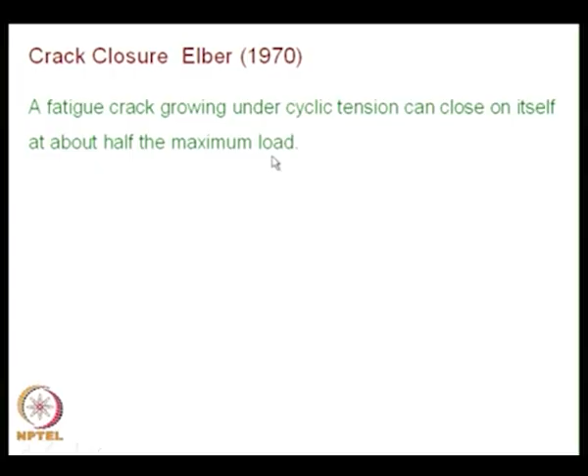So that is the reason why that chapter was covered earlier, and now we will take up a very important contribution by Elber. This was done in 1970. He brought out a concept called crack closure, and what he observed was a fatigue crack growing under cyclic tension can close on itself at about half the maximum load, and this was purely an experimental observation. Based on the experimental observation, he arrived at this kind of a very interesting result. This effect becomes significant for crack growth calculations under random loading.

So you will have to keep in mind, fatigue is one of the most difficult types of loading that acts on the structure. You will invariably have variable amplitude loading, and one of the difficulties is finding out the actual load spectrum. It is not simple. There are methodologies available, and you have to study the literature and then only calculate the actual load spectrum. So invariably you will have variable amplitude loading. From the modeling point of view, we may study under constant amplitude loading how the crack grows, but if you want to take the knowledge to the field, you will have to account for random loading, and if you go for random loading, you will have to bring in the observations of crack closure into your life estimation calculation.

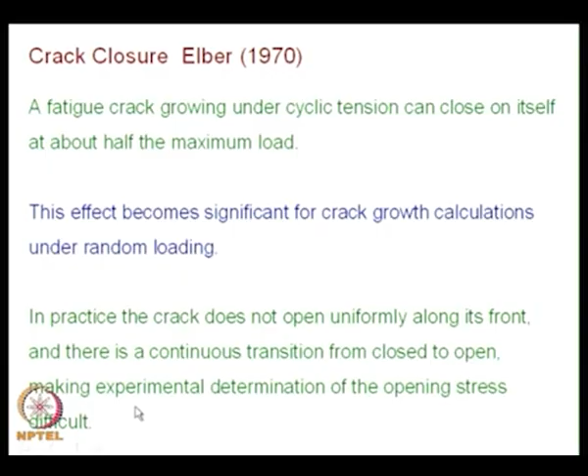And what we find is the crack closes at about half the maximum load. And how does the crack open? What is the difficulty in the experimentation? In practice, the crack does not open uniformly along its front, and there is a continuous transition from closed to open, making experimental determination of the opening stress difficult. See, unless you make certain observations by experiment and then identify these aspects to be modeled by a numerical model, you cannot develop a numerical model. So, initially you need to have experimental observation for such complex phenomena.

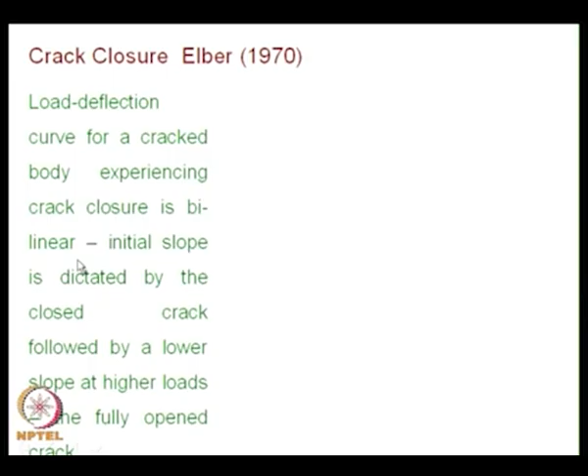So, one of the difficulties is how to see whether the crack is fully opened or not, and how do you judge whether a specimen displays crack closure phenomena. People also have methodologies to look at that, and one of the simplest ways is to get the load deflection curve. So, if you get the load deflection curve for a cracked body experiencing crack closure, it is bilinear. This is the observation, and you have the displacement versus applied stress, and the stress displacement relationship is bilinear. So, you have slope changes from the initial to later part.

Initially it is more stiff, the initial slope is dictated by the closed crack. So, that means the crack behaves as if it is smaller in length. Then you have a slope which is different. At higher loads, because the crack is fully opened, the slope is also different. So, if a fatigue cracked specimen experiences a stress displacement behavior as bilinear, which is a model again, in practice you will have a smooth transition from this to this, and that is also depicted here.

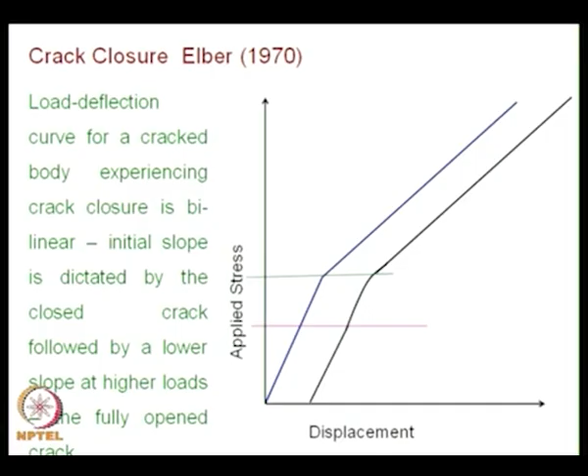And the question here is, how will you identify when the crack closes and when the crack opens? This is a very difficult measure experimentally, and people have found various ways to do that. One way of describing this is, you say at this stress, when there is a transition of the slope, the crack is fully opened, and when the curved portion becomes straight here, you say that part of the crack is closed. So, this is one way of estimation. At this stage it is also wise to look at what was the history in the case of crack closure.

Initially people did not believe that crack closure could happen. This was done by Elber. There was an article written by him in Current Contents in 1983, and in that he says, the original discovery of the crack closure phenomenon was made when I was a graduate student at the University of New South Wales in Sydney, Australia. Rather than being the result of years of directed effort, it was a split second observation made while cutting up a fatigue cracked plate. See, this is very important.

Sometimes you do a very systematic study, yet you do not get a result. Here he admits it was not a systematic study, he chanced upon an interesting observation, he was a good experimentalist, he did not miss out the details. See, this is very important. Experimentalists have to be alert, look at anything deviating from your basic understanding, record it, and be scrupulously honest, because if you report what you observe in all its totality, new theories can develop. That is what happened in crack closure concept.

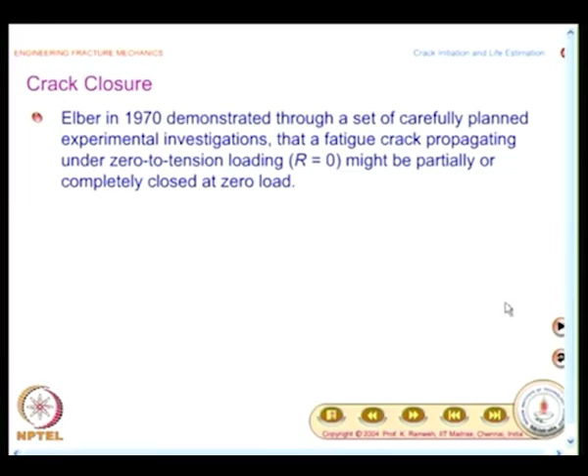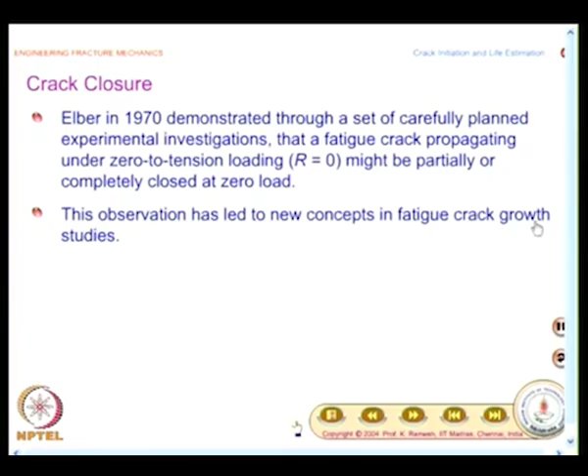So, this is what I had mentioned, which is summarized again. Elber in 1970 demonstrated through a set of carefully planned experimental investigations that a fatigue crack propagating under 0 to tension loading, that is R equal to 0, might be partially or completely closed at 0 load. And this observation has led to new concepts in fatigue crack growth studies, obviously after initial hesitation. People were not accepting his theory initially. Once it was convinced, people said how it could be modeled. The ultimate usage of this observation is how do you modify your crack growth calculation. There is a designer's approach. We will see that designer's approach first.

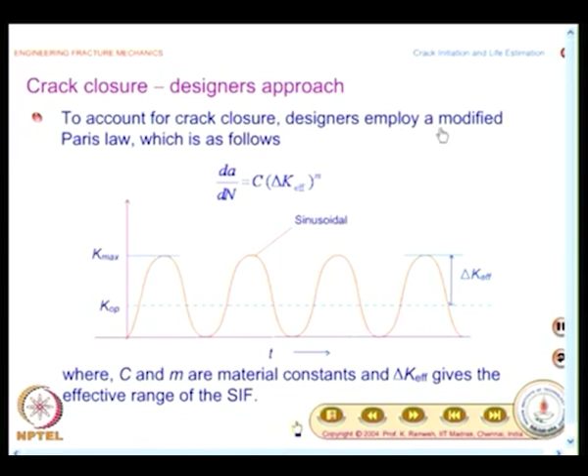So, to account for crack closure, designers employ a modified Paris law, which is as follows. Normal Paris law will have da/dN equal to C delta K power m. Here the delta K term is put as delta K effective. And how do you define what is delta K effective? Suppose I have a sinusoidal variation, and I have K max and K minimum is 0, but at a particular stress only the crack starts opening. Afterwards, only the crack becomes effective. The crack closes by this value of K op. So, the effective delta K is between K max and K op.

So, people could embed the phenomena of crack closure by taking delta K effective. Now, the question is how to find delta K effective. That is where the challenge lies. It is not a simple task. Conceptually, the crack is effective only part of the cycle. So, you look at what is the effective delta K rather than the actual delta K. So, you have to find out how to get delta K effective.

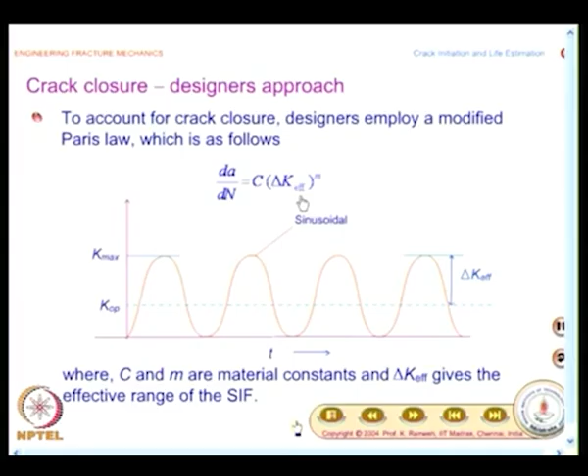Several models have been proposed. People have done experimentation and calculated it, and you will also have to bring in the effect of stress ratio R. As a function of R, how does delta K effective change? So, this is how research proceeded, and we will see how they develop delta K effective. So, delta K effective is K max minus K op, where K op is the value of K1 when the crack opens completely during the cycle, and this is difficult to evaluate, but we have to do that if I have to embed crack closure in our crack growth calculation.

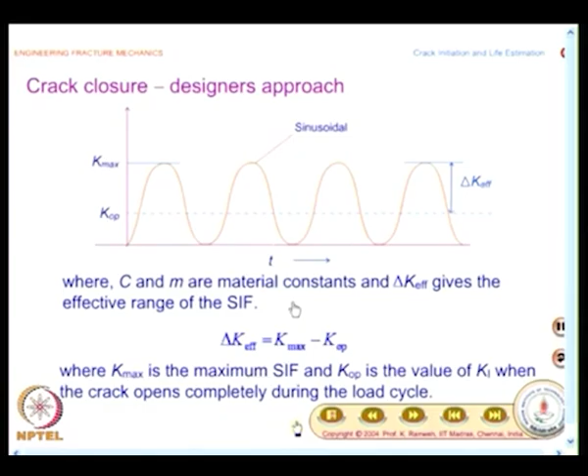There are empirical relations reported, and in order to ensure that crack closure indeed happens, Elber also provided fractographic evidence to show that crack closure could affect the shape of the striation pattern. See, if you look at the history also, whoever reports the discovery has to justify, yes, his discovery is correct. If he does not do that homework, that concept does not get recognized.

We had seen the case of Dugdale model, he had performed the experiment, but he did not report the result. So, there was skepticism among the practitioners not to accept Dugdale model in the initial stages. Once Hahn and Rosenfield provided the experimental evidence, people started using Dugdale model. So, in the case of Elber, when he reported the crack closure, later he also provided fractographic evidence to show such a thing happens, and the effect is the striation peaks are flattened due to deformations during crack closure.

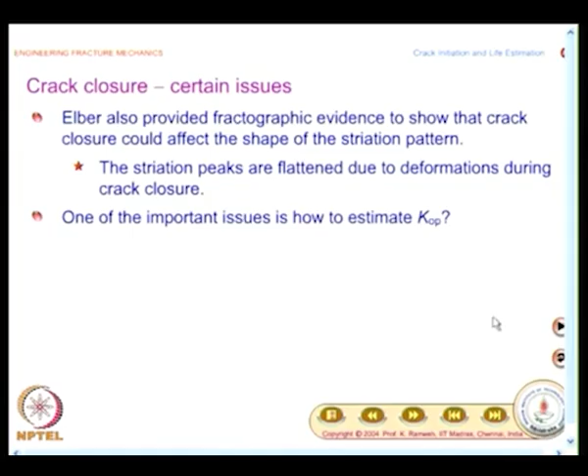And as I mentioned, one of the important issues is how to estimate the stress intensity factor corresponding to fully opened crack. And you have to note, unlike the fracture toughness, K opening is not a material constant, but depends on a number of factors. So, that makes the problem difficult. Different alloys exhibit different closure behaviors. So, this is one observation. So, you have to do a lot of tests to find out. Even for a given alloy, the closure behavior is different in different loading regimes. So, that makes the problem much more complex,

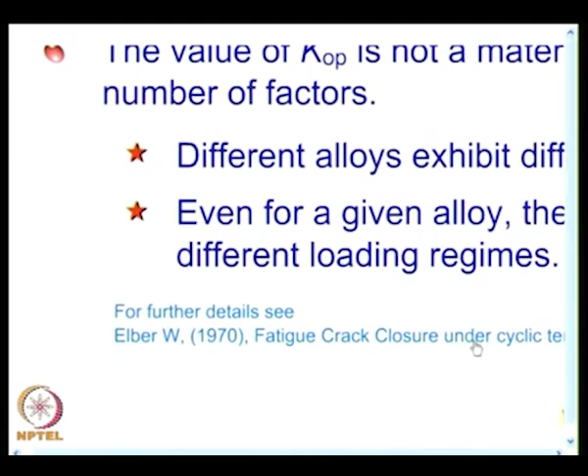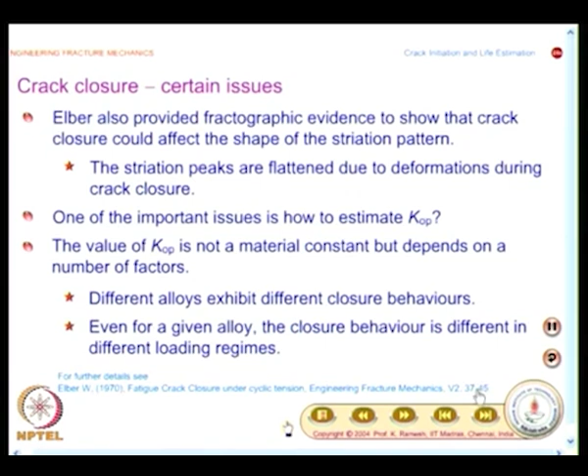and I think you have the paper by Elber. This is the paper published in 1970, fatigue crack closure under cyclic tension. This was published in Engineering Fracture Mechanics. This is volume number 2, pages 37 to 45. You can go and have a look at it, how he has presented the work.

So, you have empirical relations to find out what is delta K effective, and you know, for all aerospace structures aluminum is very important. So, you have a 2024 T3 aluminum. Elber reported that delta K effective over delta K can be written as 0.5 plus 0.4 R, where R is the stress ratio, and he had obtained the relation for the range R between 0 and 0.7, and there are also other researchers who have extended this range of R. But the point to note here is, you need to have some way of finding out what is the value of K effective. If necessary, I can also enlarge it. So, this is the equation that you have.

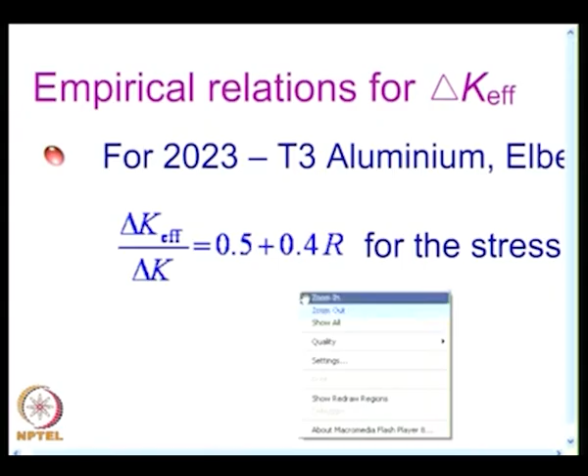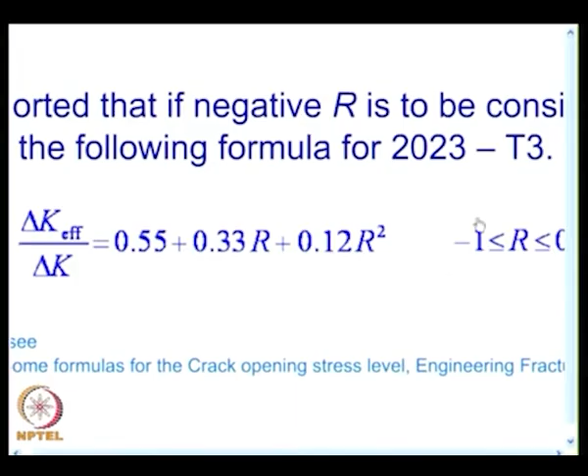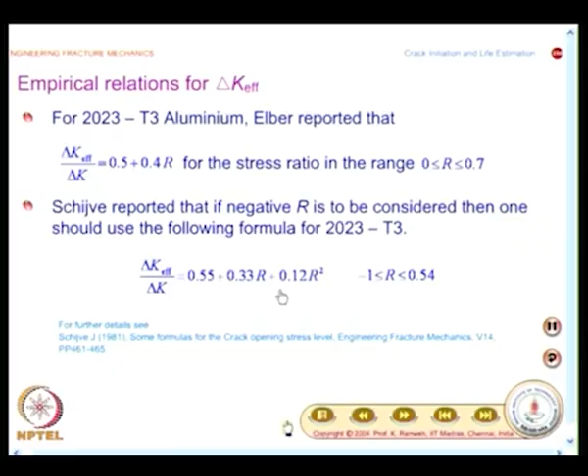And another researcher reported that if negative R is to be considered, then one should use the following formula for the same alloy. This is a little more elaborate, we will also have a look at it, but you can write the expression delta K effective divided by delta K equal to 0.55 plus 0.33 R plus 0.12 R squared. This is for R between -1 and 0.54. For other ranges of R, you have another expression. See, the point here to note is you have empirical relations available. So, look at the literature, find out for your given alloy what is the empirical relation to use, then you will be able to use

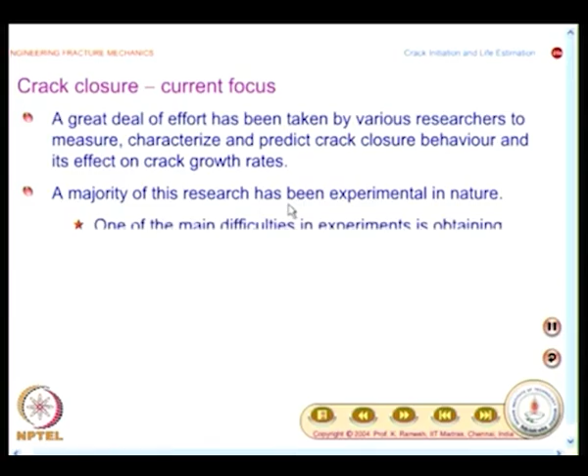the concept of crack closure. And what is the current focus of crack closure? Because initially people were not ready to accept crack closure. Once they have started accepting, people also have done additional work. A great deal of effort has been taken by various researchers to measure, characterize and predict crack closure behavior and its effect on crack growth rates. A majority of this research has been experimental in nature, that is what I said. The phenomena is complex. So, initially you have to understand what is happening through experiments. With such inputs, it is possible for you to develop numerical models.

And what is the main difficulty in the experiment? One of the main difficulties in experiments is obtaining the information of displacement histories at mid section in a thick specimen. See, I have already mentioned the crack opening is not uniform along the front. So, you have to ensure if I have a thick specimen, the in between portion whether it has opened or not, I have to have experimental measurement, only then it will be more realistic. That poses a challenge. It is challenging as it is not easily accessible.

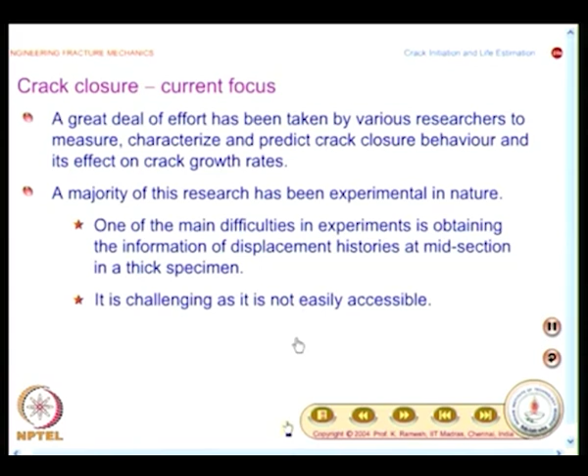I suppose you have been able to write these points and the time is sufficient for you to write. Having seen that the experiment is difficult, the current focus is on developing appropriate numerical models to study the phenomena.

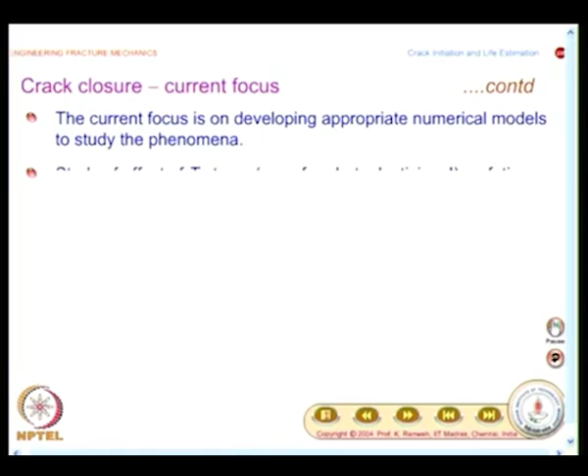Not only this, they also want to find out the effect of T stress, that is sigma naught x, for photoelasticians. We have spent ample time in understanding this when we discussed crack tip stress and displacement fields. So, they do not want to restrict only to the stress intensity factor K, they also want to go to the second term, and such an attempt is made using finite element methods, which is recently reported by Roychowdhury and Dodds. This is a paper in 2004.

I think I would read this for you. This is by Roychowdhury and R.H. Dodds. Effect of T stress on fatigue crack closure in 3D small scale yielding. This is in the International Journal of Solids and Structures, published in 2004. You would be able to see the details of the paper.

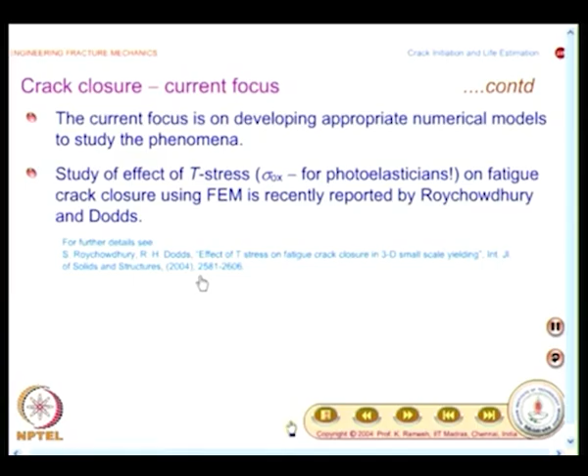And before we move further, I would also like to share another note which came in the citation classic, which Elber wrote. He mentions like this: the time from the initial discovery of any phenomenon to a profitable application is often long. In this case, which means crack closure, the inclusion of crack closure in numerical crack growth calculations adds significant cost and complexity for gains in accuracy only required in the space and aeronautics industries. Many industries will continue to use simpler and less accurate theories, leaving the continued work in crack closure as an area of basic research. So, you will have to keep in mind, if you want to employ a new phenomenon, it does not come cheap, it comes with added cost.

Now, what we will do is, we will try to go and understand what is crack closure. There are various categories of crack closure, and we will first see plasticity induced crack closure. And the first concept that you have to learn is, what is the residual stress ahead of a crack in a cycle. What is shown here in a tiny fashion is actually when you have a sinusoidal load, you are looking at one half of the curve where you are going from 0 to maximum. So, when I go from 0 to maximum, we would see what happens at the crack tip.

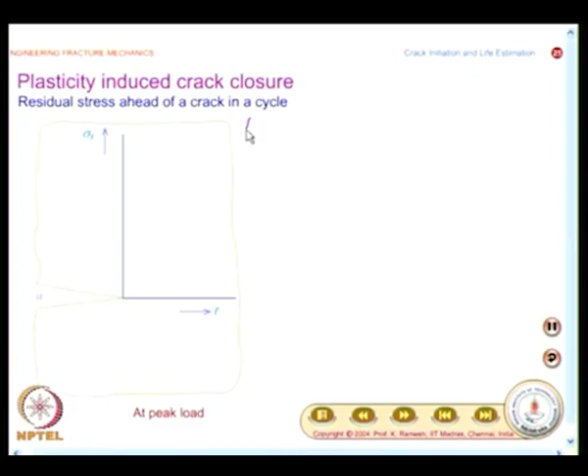So, what I will do is, I will replay this animation again. You have carefully drawn this sketch as much as possible, and what we will do now is replay the animation where I am showing what happens when load is increased from 0 to the peak value. So, you will have a plastic zone and this is the elastic region, and this is the approximate shape of the plastic zone at the crack tip, surrounded by elastic region, and this is schematic.

Do not think only a circle around the crack is elastic. No, it is not so, just for visualization purpose, because we have to feel something goes and compresses it. That visualization is very good when I show something in blue color and then it works. Now what I am going to do is I am going to reduce the load. This is the story when load is increased from 0 to peak load,

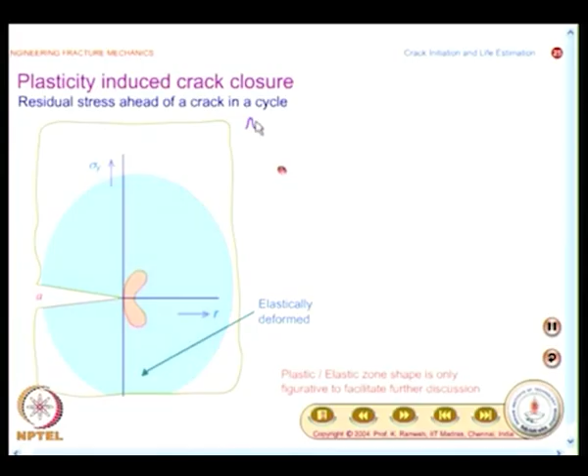and this plastic zone is subjected to tension. It is a value of sigma ys. When there is elastic spring back, when the load is reduced, you have a plastic zone where the stress is minus sigma ys, and that is what is shown here. And you have a compression followed by residual tension. If you understand this, all our future discussions become easier to discuss.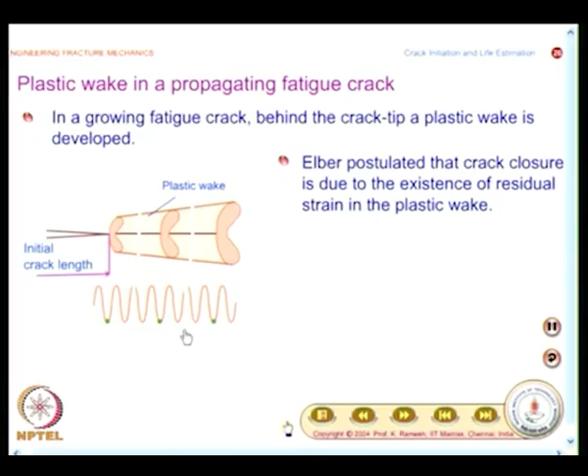You would have noticed that there was an oscillation. So, I think what I can do is I can quickly zoom it. So, this only shows that I am looking at a cracked specimen after this kind of loading. Okay. So, what you find here is a strip of material along the crack edges, though no longer loaded but has undergone plastic deformation previously, constitutes the plastic wake. We had seen it in the previous slide, and what is depicted here is, I have a cyclical loading and I am discussing what happens at this point, that is, after a few cycles at the peak load, the story of the crack would be like this. I would have a crack fully open, but it would have a plastic wake.

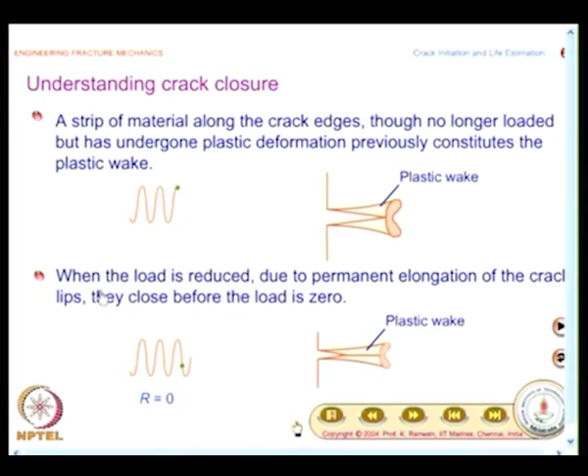A strip of material along the crack edges, though no longer loaded but has undergone plastic deformation previously, constitutes the plastic wake. So, you have the plastic wake shown. Suppose I reduce the load, what happens? When the load is reduced due to permanent elongation of the crack lips, they close before the load is 0. So, that is what is shown here. Ideally, only when the load point comes to this, the value of stress is 0, but even at this stage you find the crack is closed. So, the effective SIF has to be calculated from this point to this, it cannot go from 0 to K max. So, that is the issue that is being discussed.

So, what you are really looking at is, because of cyclical loading, if the load is increased and decreased, there is residual stress formation. If I have multiple cycles like this, the crack has to go through the plastic wake, and the plastic wake makes the crack faces close before the load reaches 0. So, that means only part of the loading is really felt by the crack, that is why we have K effective, and this was the model proposed by Elber, and later similar models have been proposed for various situations. So, what you have here is the crack is fully open when the load is at its peak, but the crack is closed even before the load has reached 0. So, that is the issue that you have to keep in mind, and this explains how to understand the phenomena of crack closure.

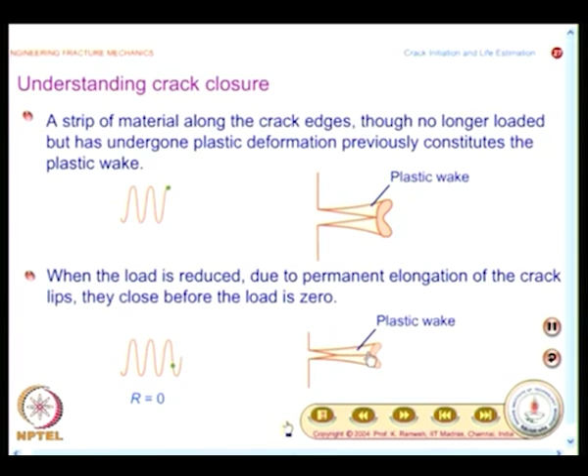And you can see the animation again. For this case, you have the plastic wake, and this explains what is the plastic wake, and this shows when the load is reduced, you find when the load is still having some value, the crack is closed. And you also have the typical residual stress pattern at 0 load, and I think I can magnify this for you.

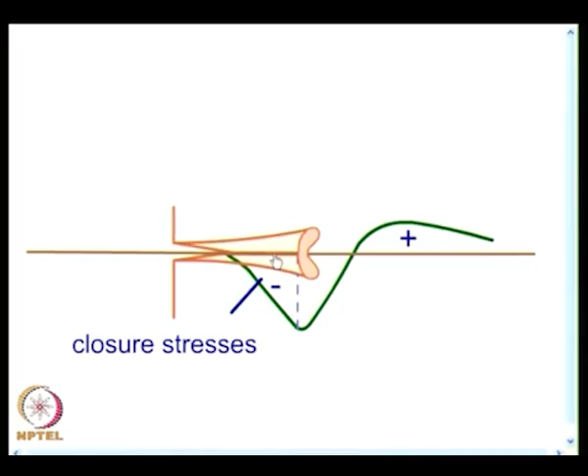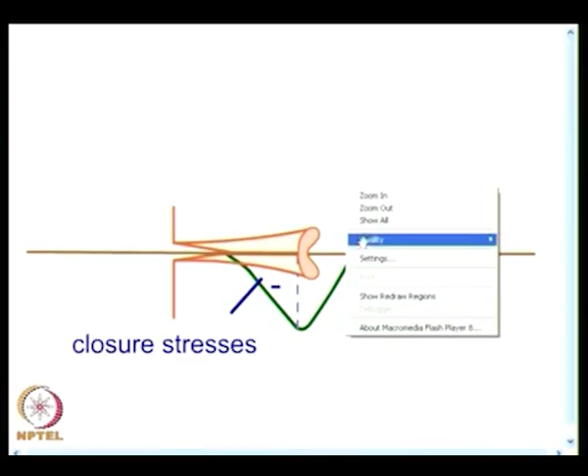So, I have this as closure stresses, and you have a residual compression here, and because of this the crack surface is closed, and this needs to be appropriately modeled in your dA by dN calculation, and that is what is given in the next slide. In view of this, the crack faces do not open until K reaches

K opening. You have already drawn this graph. This is just to emphasize that you have to use a delta K effective, and we have also seen this becomes significant when you have random loading. For constant amplitude loading, probably you may not want to use it, but for space structures you will have to definitely do, is the recommendation by Elber, and it comes with a cost, it does not come cheap.

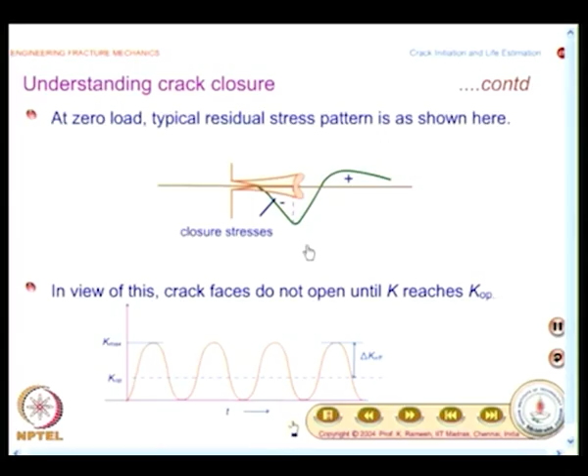Once you have appreciated this, there are also other models that are given which are easy to understand on a similar logical framework. Crack closure can also happen because of phase transformation. The residual strain developed as a result of a phase transformation produced by applied stress also causes crack closure. The physical appreciation of phenomena is very similar to plasticity induced case.

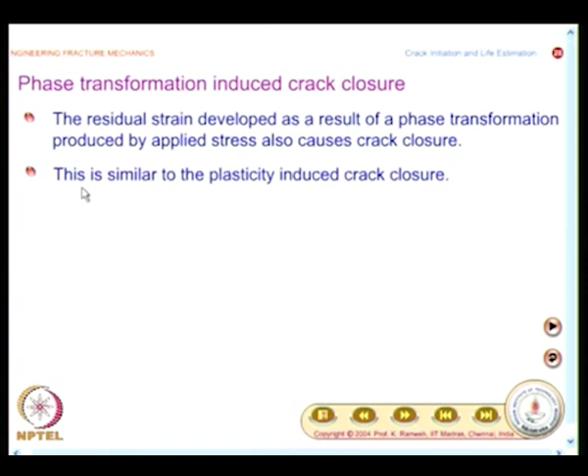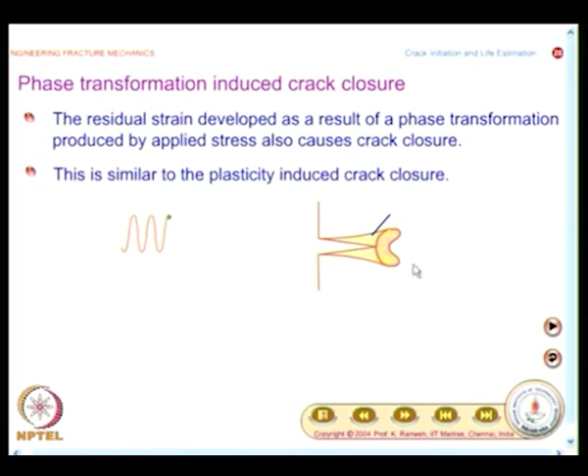Instead of the plastic wake, here it would all be dictated by the phase transformation, otherwise there is comparison between the two, and that is what is mentioned here. This is similar to the plasticity induced crack closure. Here again you look at after few cycles at the peak load. At the peak load the crack is open, just to distinguish it from plastic wake, here the shading is different, but these pictures are essentially same, and this is because of phase transformation.

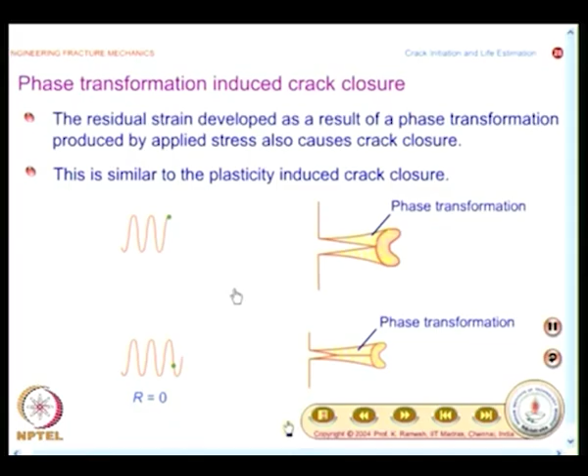And now you see when the load is reduced, before it reaches 0 the crack is closed, it is because of phase transformation. So, that is what is indicated here. So, once people understood the concept of crack closure postulated by Elber, several other mechanisms have been identified. One is because of plasticity induced, here it is because of phase transformation, and the third case is wedge induced crack closure, it could be due to oxide, usually associated with aggressive environment.

The corrosion products become wedged between crack faces, that is what is shown here. I can show it a little bigger. Because of the corrosive action you have corrosion product shown, and when the load is reduced, because of the corrosion products it appears as if the crack is closed. It has a similar effect of crack closure, and this is called oxide induced closure. So, this is observed in aggressive environment.

In every case discussing on crack closure, we show the cyclical loading. You see what happens at the peak load and what happens when the load is reduced and when the crack faces are closed. So, that is the way you have to interpret what is given on the left and what is given on the right. Left shows the loading and the green point shows in the loading history at which point we are really looking at the crack faces. This is at the peak load, this is at a reduced load.

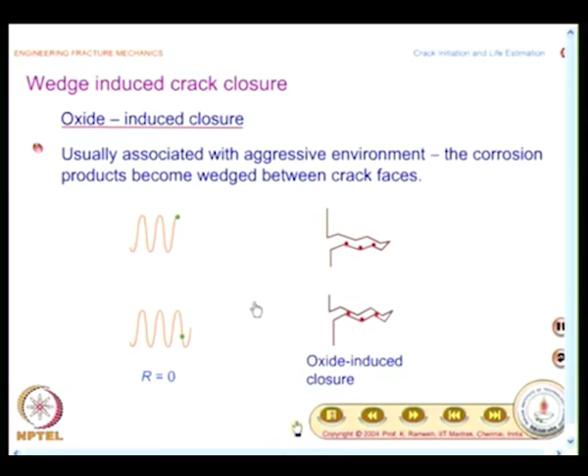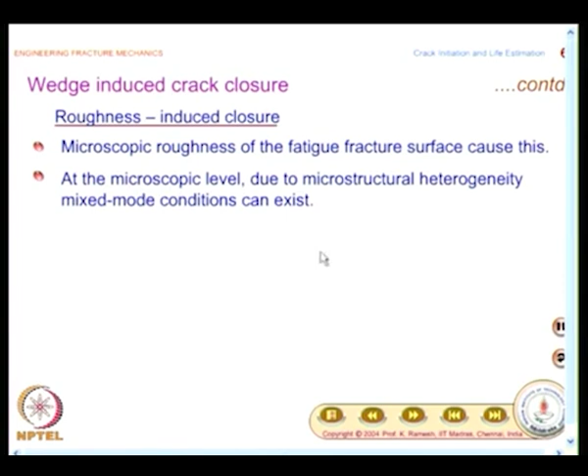Then you also have roughness induced closure, this is another phenomena, and what is reported is microscopic roughness of the fatigue fracture surface caused this. At the microscopic level, due to microstructural heterogeneity, mixed mode conditions can exist. Once you come to here, too much of material science knowledge you need to have, it is all highly exaggerated pictures I am going to show. So, do not come and say why you put the crack faces as jagged. At such high magnification, even a straight edge would appear jagged only.

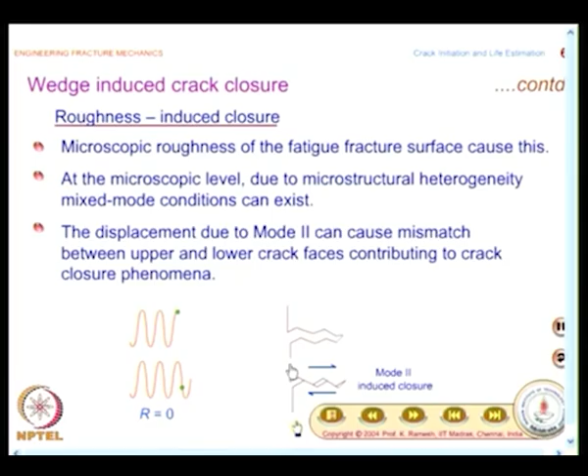So, you have to look at, these are not macroscopic pictures, highly magnified microscopic pictures, that is the way you have to look at it. And what is mentioned is the displacement due to mode 2 can cause mismatch between upper and lower crack faces, contributing to crack closure phenomena. And we will also see that as a picture. Here again you see the load history, at the peak load you are looking at it, and at the reduced load you have a picture like this. I think I could magnify it for you, and this is called the mode 2 induced closure, and this mode 2 loading comes at the microscopic level.

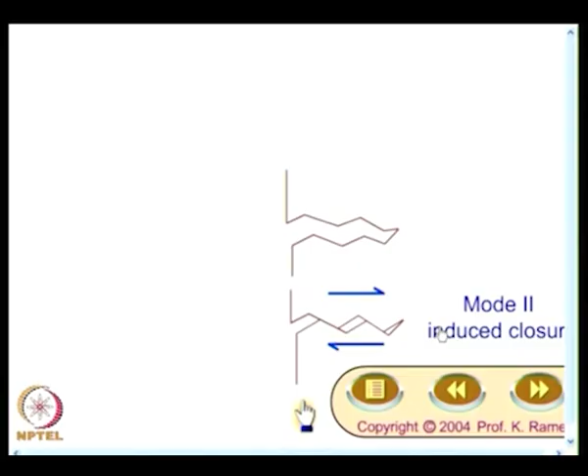So, what you will have to keep in mind is crack closure is an accepted phenomenon, though it was not initially accepted. Later people have recognized its role, and many other mechanisms also people have observed and categorized. In all those cases you should have a methodology to find out delta K effective. So, you have to perform more tests and look at the literature and find out how to get the delta K effective. Only then will you be able to use the crack closure model for finding out the dA by dN.

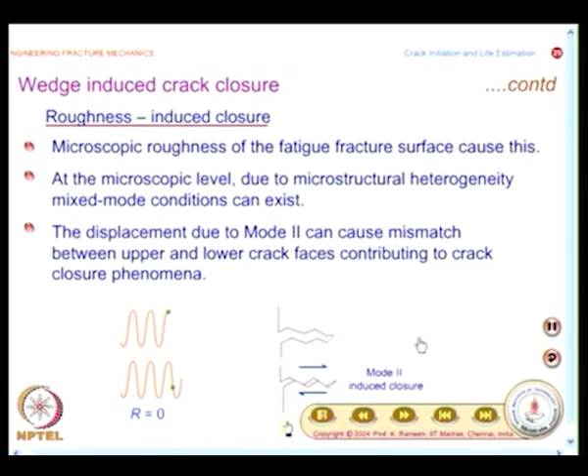There is also another important aspect that you have to keep in mind. Suppose I have an overload, is it beneficial from the fracture mechanics point of view or not? If you recall, in my earlier discussion I have said plasticity is a friend of fracture mechanics. In fact, we would argue based on that only, and people have noticed if you do proof testing occasionally, the life of the structure is improved. In proof testing, what do they do? They load the structure up to 125% of the load for which it is designed. So, you are really putting an overload

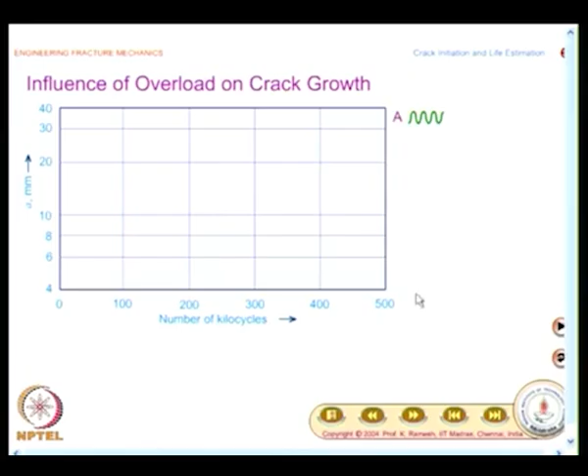at periodic intervals. People have observed from actual practice that it has helped the life of the structure, and you will have a proof based on plastic deformation that overload really helps, and overload of what kind, that is another question. So, we will look at a graph like this. On the x axis you have the number of kilocycles, on the y axis the length of the crack is put, it is a log graph on the y axis, and initially you take a constant amplitude, and let us see how the crack growth for this case is. You also have some numbers given to this, it is varying from 48 MPa to 113 MPa, and you find the crack growth is something like this.

Suppose after some time I have an overload which goes from positive to negative, it goes to 188 MPa to minus 28 MPa for the purpose of this graph. And how does the crack growth look like? Definitely the rate at which the crack grows after an overload going from positive to negative is smaller than what you see when you have constant amplitude, but it has not really benefited the structure.

Let me take another case where I have an overload only in the positive direction. How does the crack growth rate change? And what you find here is when there is overload only in the positive direction, there is definitely retardation in the crack growth, and I have another overload here, another overload here. You have to know why is this so. Nevertheless, it is beneficial. So, the wisdom people gain by sheer experience of periodic proof testing of the structure has helped its life. You have an answer from the fracture mechanics point of view.

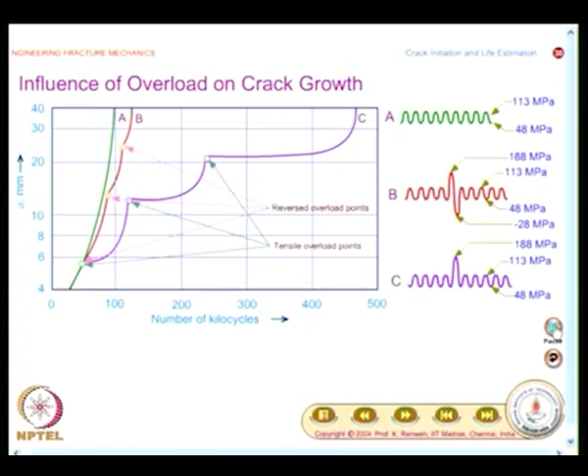The way we are going to look at it is that the plastic zone would be much larger when I have an overload, and that has helped this retardation. So, your modeling of the plastic zone is very important, and recognizing that when you have a cyclical load, you are going to have a residual stress ahead of the crack tip, and when I have an occasional overload, I will have a very large plastic zone, and this crack has to wade through that plastic zone. So, that in a sense retards the crack growth, and you have a model for that, and this model is proposed by Wheeler. The details of it we would see in the next class.

Again he will go back to the basic kernel of how Paris reported dA by dN, there would be a modification to that which will accommodate the effect of overload, and this is very important in the fracture literature, the influence of overload on crack growth. So, in one graph you see for the constant amplitude how the crack growth is, for a reversed overload how the retardation takes place, for overload in one direction the retardation is quite significant.

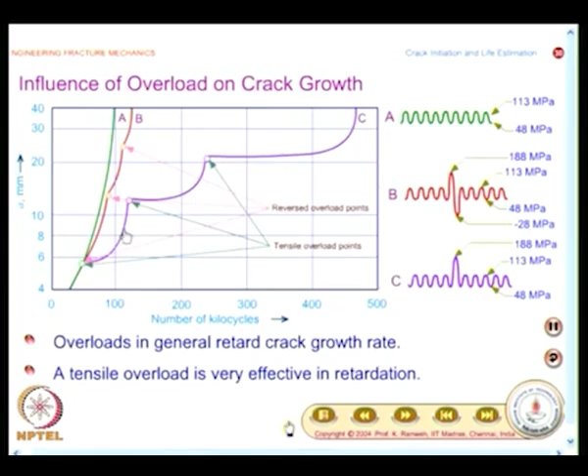So, in this class we have essentially looked at the concept of crack closure proposed by Elber. We also saw how he arrived at crack closure, how the result was initially accepted by the community. After the sustained effort he has been able to convince the scientific community to accept this phenomenon. Now it has become a routine in advanced life estimation calculations. People have embedded that, and software like NASGRO and such software use this as part of their life estimation calculation. Thank you.